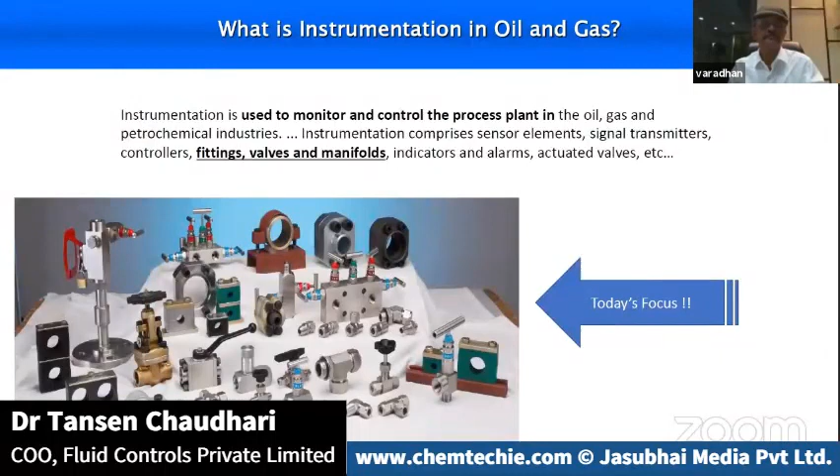I'm going to connect the oil and gas segment to other segments where the same products could be used in different forms and functions, and still the expectations as an instrumentation product - pressure and measurements at high severity - can still be leveraged. Moving to slide number 3.

Just to refresh, in oil and gas, this is how the plant and flow control would happen. If you look at slide number 5, it's all about the systems which everybody currently uses, basically transmitters, gauges, etc. The whole conference is about oil and gas, so I'm not going to dwell more on these products because their use in these segments is quite well known.

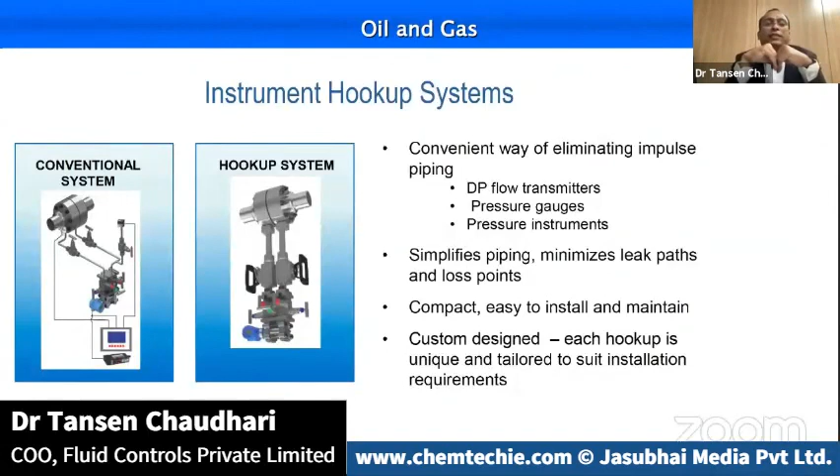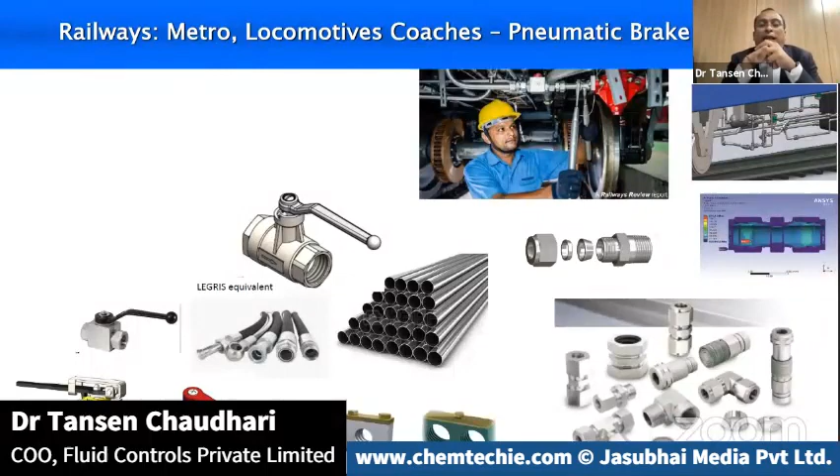If you look at the next slide, the same products which the oil and gas segment has are getting leveraged into other segments as well, in terms of their usability and product flexibility.

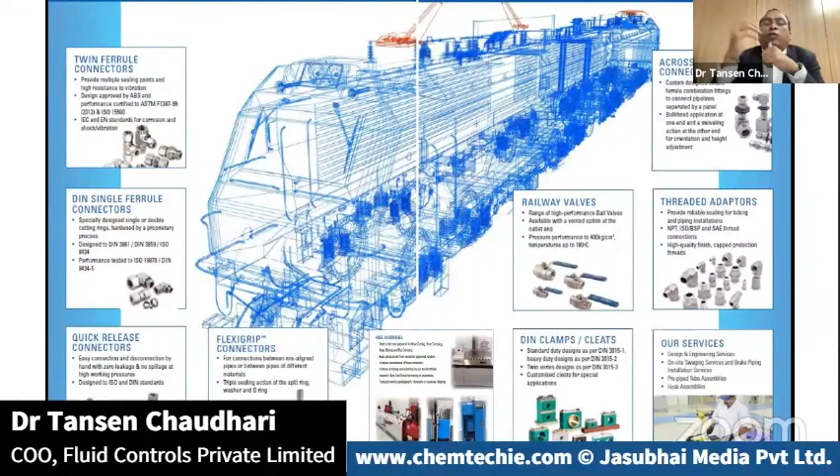Moving to the next slide, the same products - the machines and usability - like on the left side, the typical crimping machine and swaging machine used in oil and gas for fitting purposes, are still used in the railway segment as well. Using the same innovation concepts, we've also given a unique solution to the railway industry for connecting the bottom side of the railway to the top side, in terms of the flowing - instrumentation being the measurement of what flows inside as a flow or fluid.

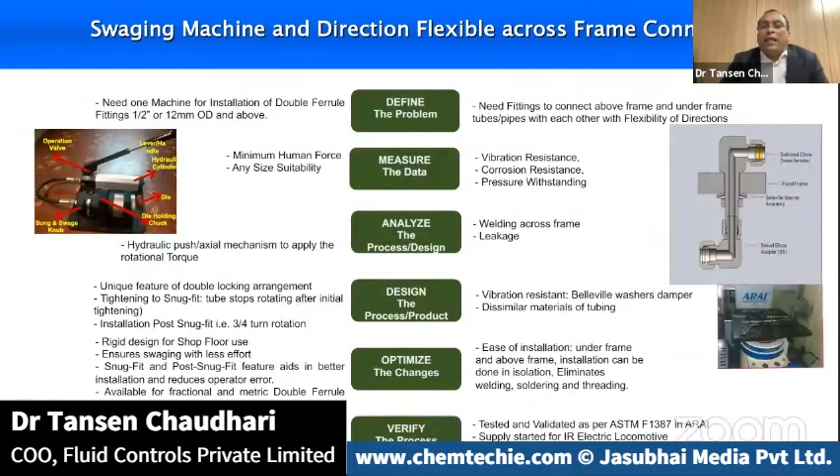I'll move to the next slide, where I'm going to talk about similar products getting leveraged and used in the power industry. When I refer to power, in slide 11 I'm talking about the nuclear industry - specifically nuclear power generation, where the manifold concepts we have in oil and gas are still used at a different level, such as a bellows sealed manifold, more in terms of high pressure, temperature, and reliability, because these products sit into the reactor basically.

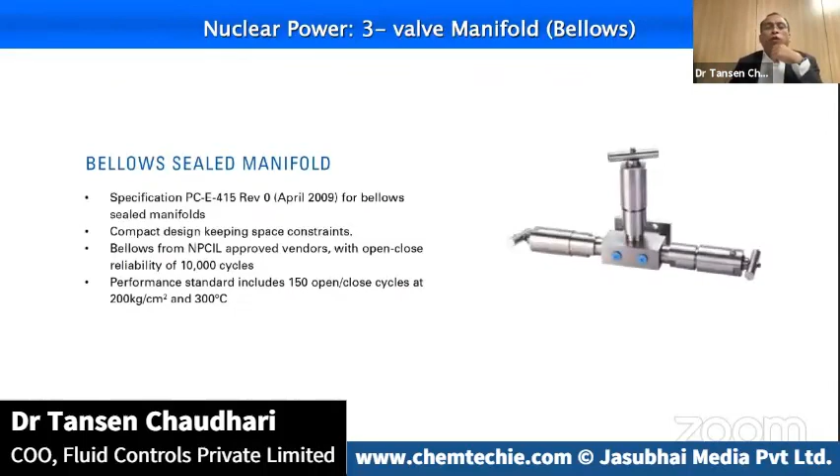On my slide 12, I'm talking about the 5-valve manifolds used in the instrumentation industry, leveraged in nuclear power for high pressure of 110 kg/cm2 and temperature up to 300 degrees Celsius, where sealing, as Mr. Varadhan also referred, is critically required because reliability demands non-stop performing.

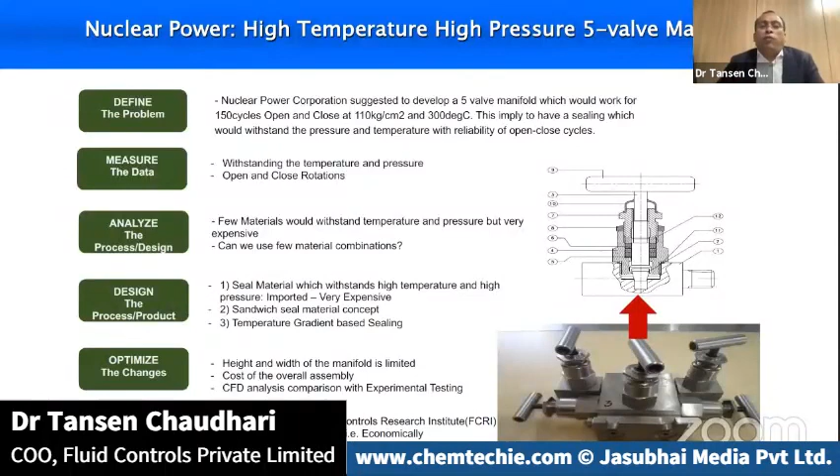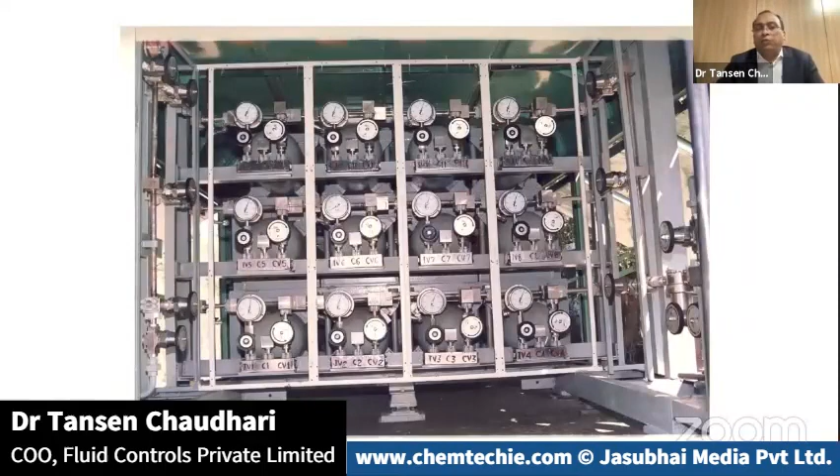Now I'm moving to the defense industry, similar products. Slide 14, you will see this is nothing but surface launch vehicles of the missile. The next slide shows the same instrumentation products which oil and gas, power, or railways use, are getting used in defense launch vehicles as well. The circuit looks complicated, but the next slide will talk in more detail about the instrumentation products.

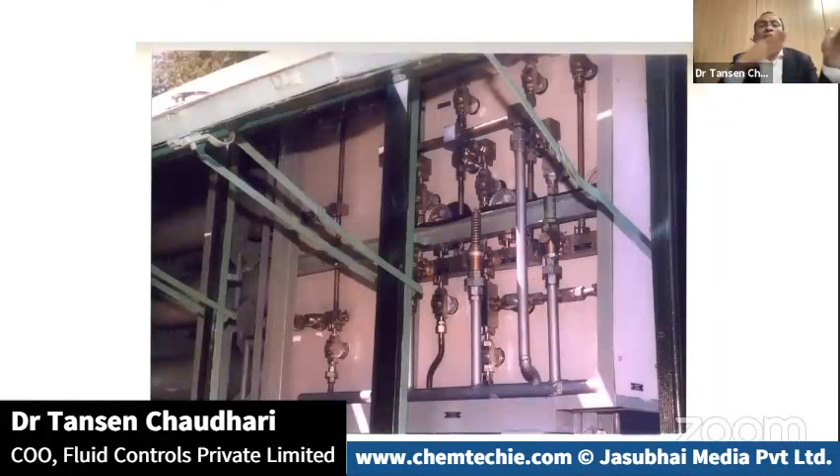So the flexibility of the product is nothing but knowing what each product in this segment is expected to perform. Oil and gas expects it at one end from different angles, but none of this industry is going to let go of reliability, product functionality, and the fitment expected out of it.

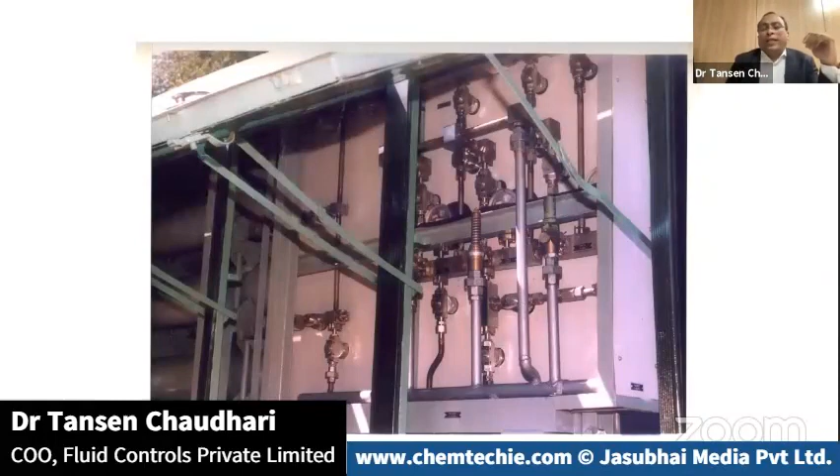And in the defense segment also, we've seen how during launch, when satellites and missiles are launched, back pressure and forward pressure in the beginning need to be withstood by these products, which are system critical from the flexibility perspective.

So the concept I wanted to launch is that products of one segment at the same severity and leverage can be leveraged in another segment with the same reliability. The flexibility is there, and many global standards like ASME, ASTM, etc., drive the functionality of products across segments.

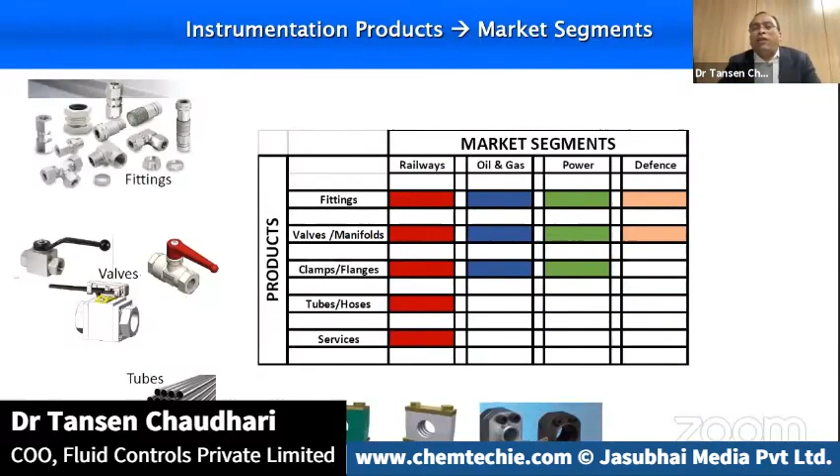So the last slide of mine is about where all these products are currently going. I represent a company called Fluid Controls, in this segment since 1974. We work with many research institutes to have the same product functionality offered into the next product functionality in terms of fit, function, and form, basically in terms of reliability.

So the next slide of mine is all about localization and having one product leveraging flexibility to the rest of these segments as well.